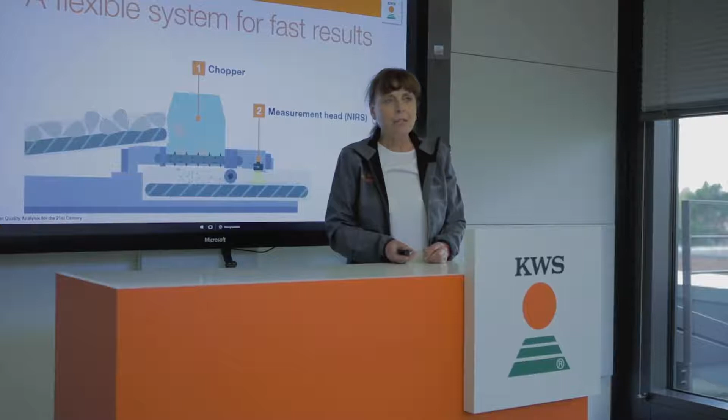I will first give you a short introduction about the development of the KWS BEETROMETER, what we have developed over the last years. At first, I will give you a short look - if you see such a BEETROMETER, it looks very simple. In the end, we have a conveyor belt, a specially developed chopper, and the measurement system based on near-infrared spectroscopy. But the system looks very simple, and so the system is also very flexible.

This allows us to make quality analysis in sugar beet along the value chain of the quality of the sugar beet. We have analyzers on the field, such as BEETROMETERs installed for almost 10 years on harvesters, that allow us to analyze sugar beets directly during harvest for the main quality components. Next, you can use such a BEETROMETER in a receiving station in a sugar factory, for instance, or in a quality lab of a sugar institute.

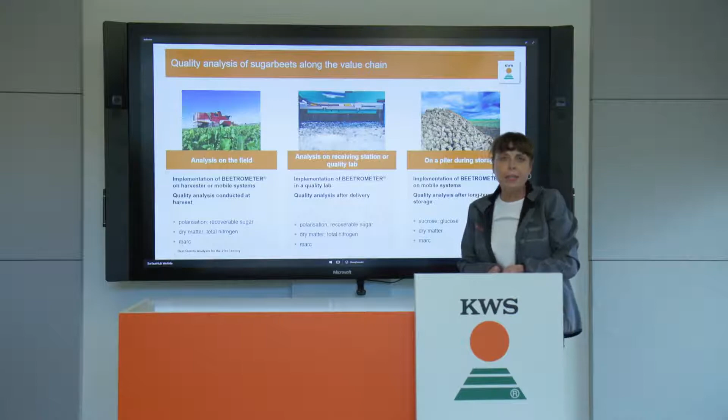Also, therefore, we have respective calibrations. And last but not least, you can use such a BEETROMETER also on a mobile system, on a trailer, for instance, and can analyze stored beets with this system. We have respective calibrations for washed beets, for unwashed beets, for fresh beets, and for stored beets.

The development of such a system has its challenges. The most important challenge is the heterogeneity of the quality components.

The next advantage of our BEETROMETER is that it can mainly shorten the steps in the analysis. In the normal way, in the sugar factory, we have the delivery, then we take a sample, we have the washing process, the sawing process, brei processing, preparation of the filtrates, and the analysis.

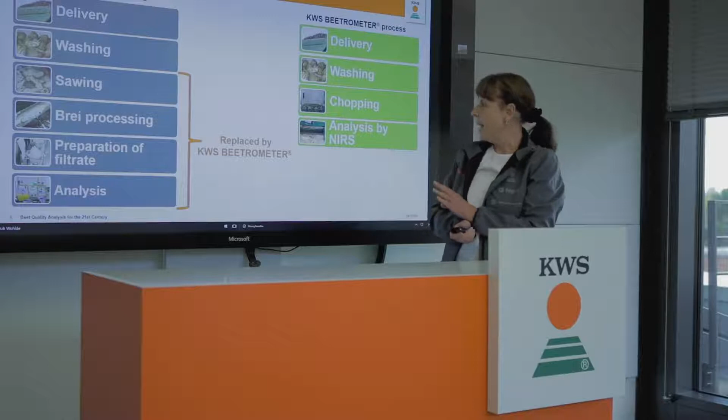With the development of the KWS BEETROMETER, we are able to replace many important steps. Of course we still have the delivery of the beets, and the washing process of the sample we have taken, but all the other steps are completely replaced by our KWS BEETROMETER.

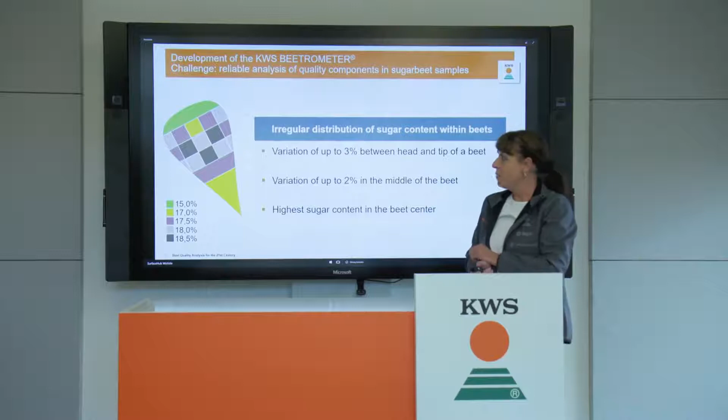Now I come to the biggest challenge when you develop such a method. The main problem is, as I said, you have an irregular distribution of quality components within a beet. We did a special trial four or five years ago, analyzing the different segments of a beet.

What you see on the left side are different colors, and the segments mark different sugar content. You see that alone between the head of a beet and the tip of the beet, there is a variation of sugar content of up to 3%.

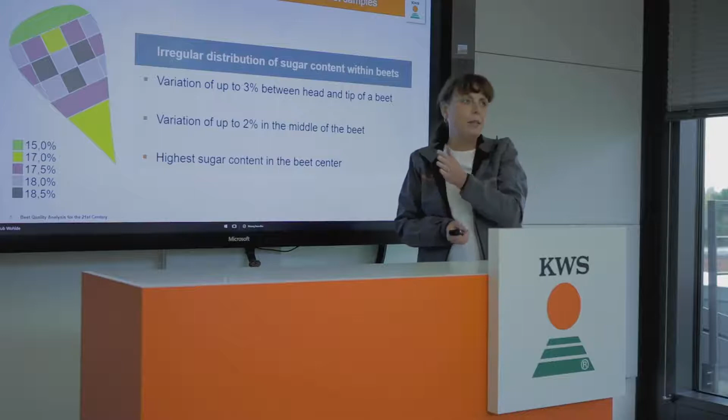And if we then look in the middle of a beet, comparing the outside of a beet and the center of the beet, we have a variation of sugar content of up to 2%.

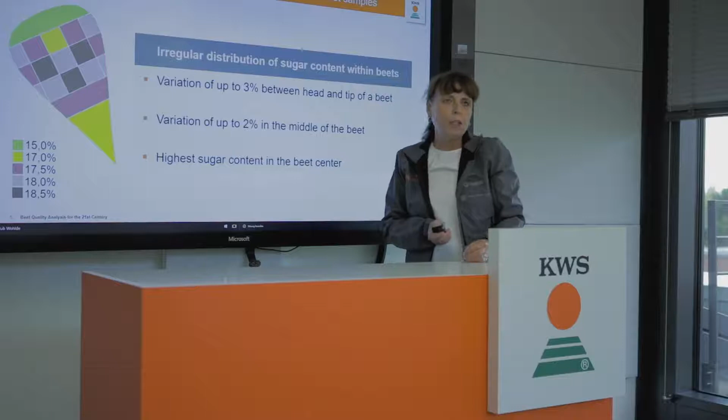The next problem is that this irregular distribution of quality components exists not only within beets, but also between beets. As an example, from a uniform field, more than 450 samples were taken, with a sample size of around 12 beets.

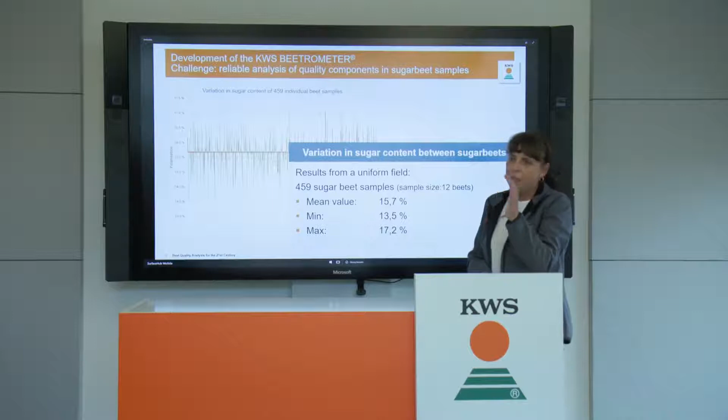Then the question I always get is: if you compare the results of the BEETROMETER with a typical price sample, how big is the difference? Then I ask you, as an analytical scientist, what is the real value from the sample?

For instance, we have a delivery of 25 tons. From this 25 tons, we take a subsample of around 40 kilograms. We do our pre-processing, then take a subsample of 26 grams, and in the end we make a filtrate, using only a few milliliters for the analysis.

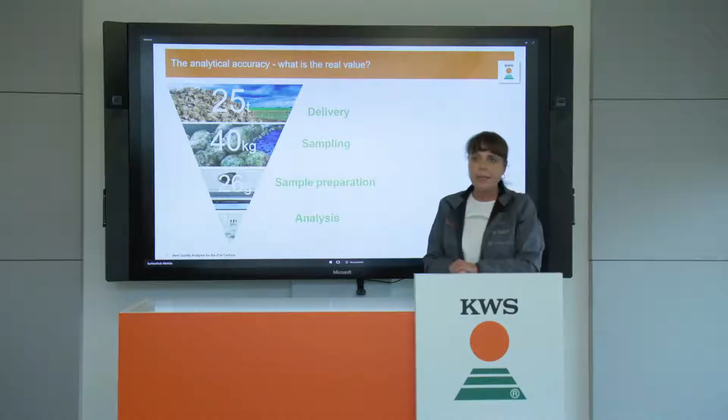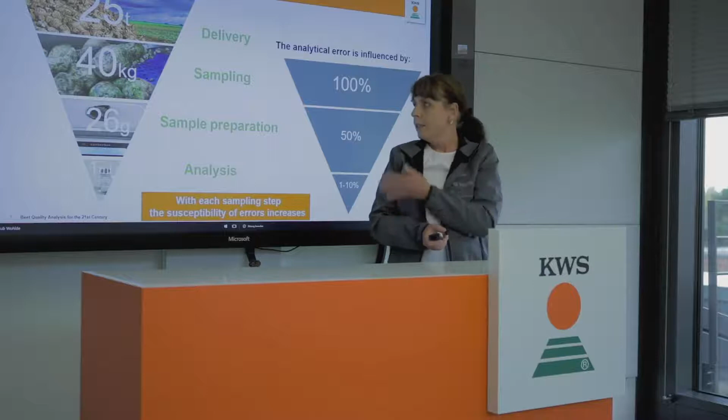From the analytical point of view, the biggest error comes from the sampling step itself — first when we take the subsample of 40 kilograms, and then in the sample preparation, the brei production.

Brei production is a very important process. You have to include all parts of the beet, and all beets of a sample. If done correctly, you end up with around 1.5 kilograms of brei, from which we take only 26 grams for analysis, and from the whole filtrate produced in the laboratory, we use only a few milliliters.

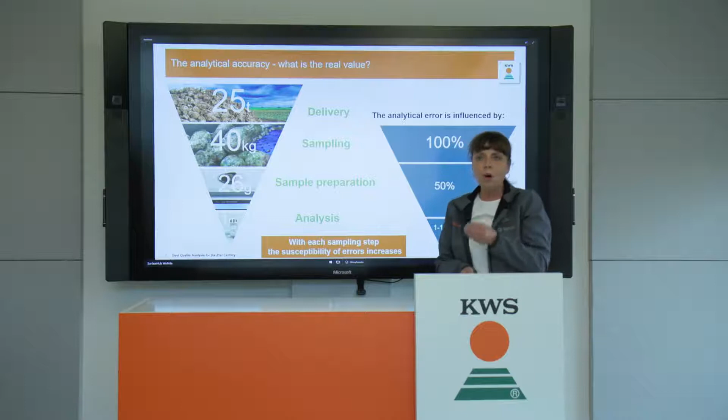That means with each sampling step, the susceptibility to errors increases. If we think about applying near-infrared spectroscopy to develop a method, we have to consider the sample preparation.

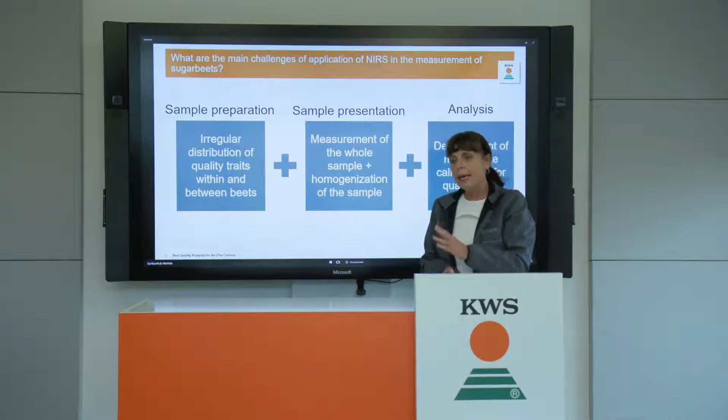We have to think about the irregular distribution of quality components within and between beets. We need to measure the whole sample and achieve a homogenization of the sample. And last but not least, we need multivariate calibrations for the prediction of the quality components.

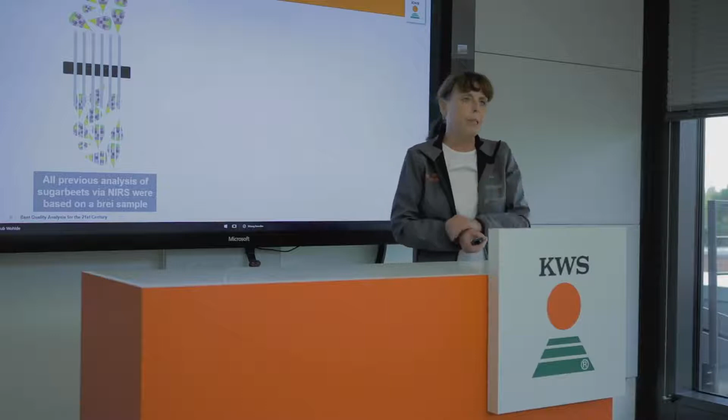At the beginning of the development, what we had seen from previous analysis with NIR spectroscopy, all of this work was based on a brei sample. This is clear since the production and sample preparation of a brei sample is a well-known approach and well-accepted worldwide method for sugar beets.

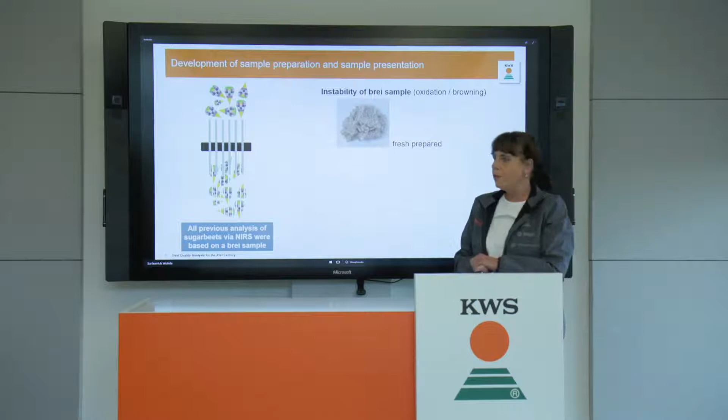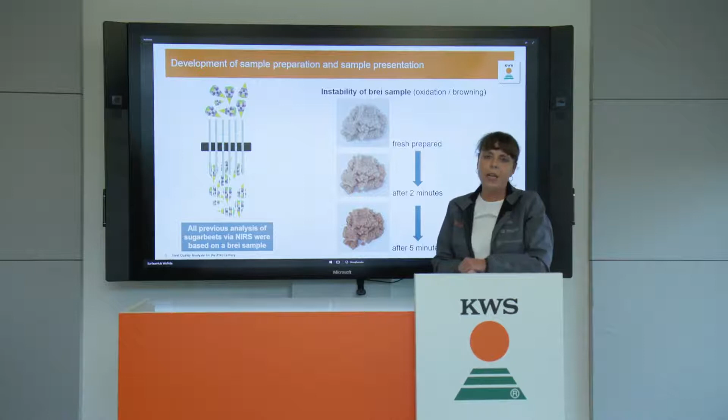The problem is it's the right approach for subsequent wet analytical chemistry, but such a brei sample is not stable. We have high instability, and if you produce such a brei sample, within a few minutes you have a change in color from white to dark brown. We have not only a change in color, but also immediately after processing, an influence on the sugar content.

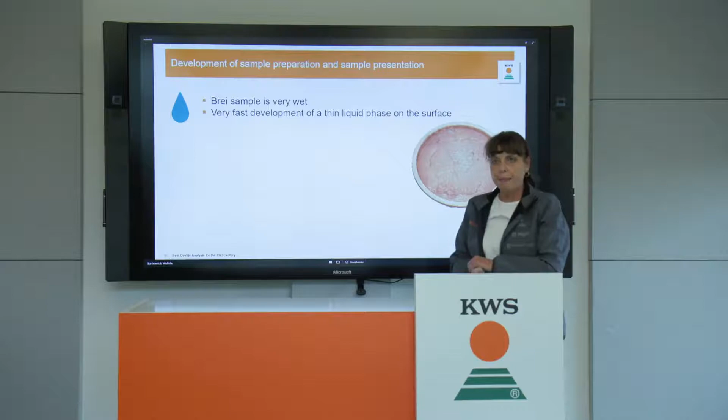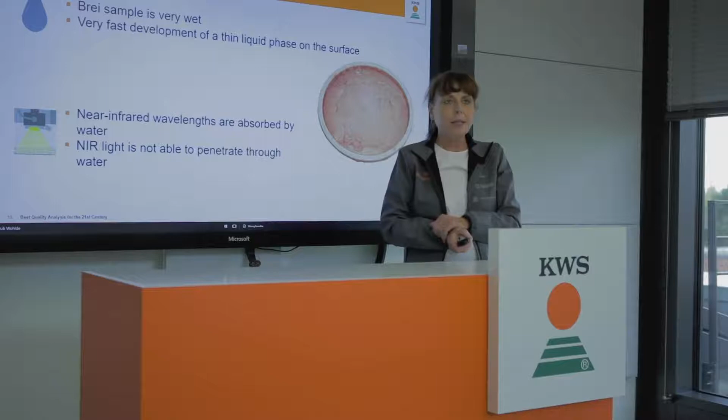The main problem with such a Brei sample is that it's very wet. It's clear our sugar beets consist of 75% water only. What happens is you have a very fast development of a thin liquid phase on the surface of such a Brei sample. If you respect the rules of near-infrared spectroscopy, you know near-infrared wavelengths are completely absorbed by water, meaning NIR light is not able to penetrate through water. So if you make a measurement on a Brei sample's surface, you analyze only a few microliters of the liquid phase. If you put your Brei sample in a glass cup and measure on the bottom, you also only analyze a few grams. So it was clear: for the application of near-infrared spectroscopy, Brei is not a solution.

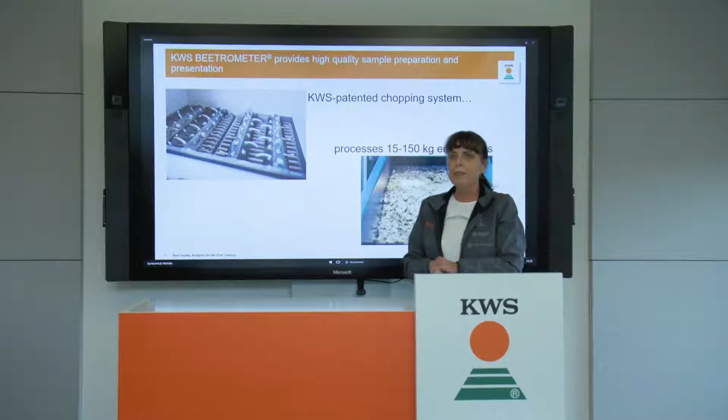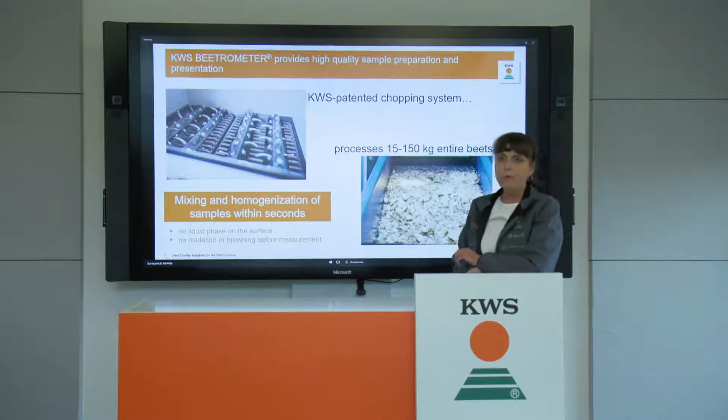Therefore, we developed a special chopping system that allows us to process between 15 to 150 kilograms of beets in only a few seconds, including mixing and homogenization steps. We have no liquid phase on these chopped beets, and this is important. Since this works so fast, there is no oxidation and browning before the measurement of the chopped beets. This was the basis to develop the method for near-infrared spectroscopy.

Today we have a uniform sample presentation with a pressure roll producing an even surface from all the chopped beets. We can analyze the whole sample. There is no further sampling step inside, since the whole sample and chopped beets are moved under the sensor. At a distance of 200 millimeters to the sample surface, every 40 milliseconds a spectrum is scanned while the chopped beets move under the sensor.

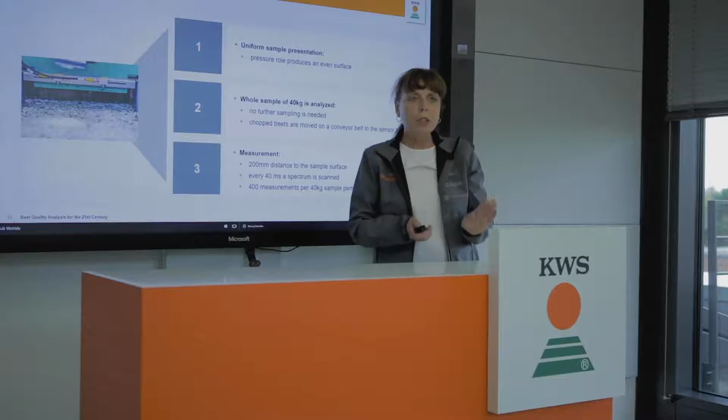So in the end, from a sample size of around 40 kilograms, we have more than 400 spectra analyzed in 15 seconds, and the whole process, including sample preparation, takes only 20 seconds.

This was an overview about the work process of the BEETROMETER, and now I will hand over to my colleague, Elton Carvalho.

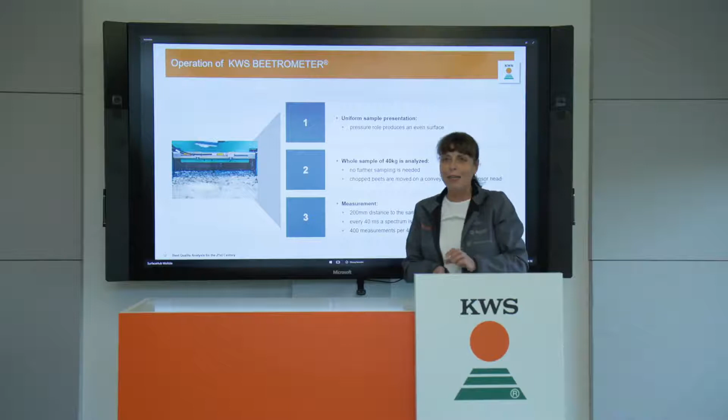Thank you, Elke, for this wonderful presentation. Weren't you impressed by this? This took a lot of time, 10 years of hard work, yeah? Well, this makes my job as a business manager so much simpler. Because a good product sells itself.

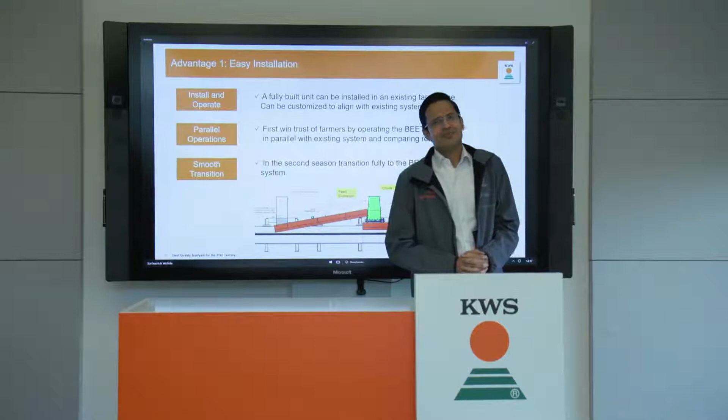Say, assume, like me, you were equally impressed with Elke's presentation. You trust KWS as a reliable partner within the sugar beet industry, and you want to move forward into the 21st century. What would be the advantages for you?

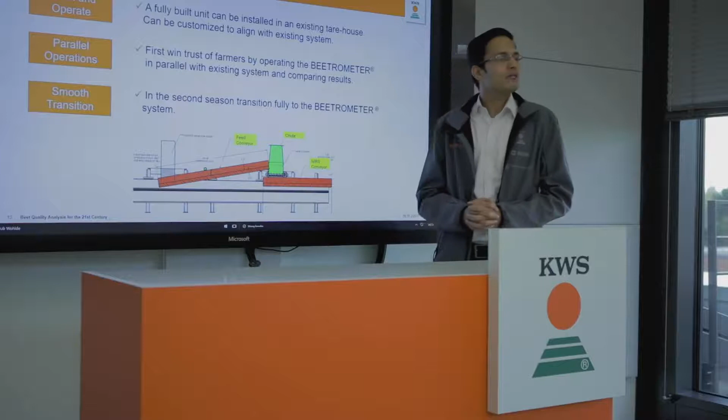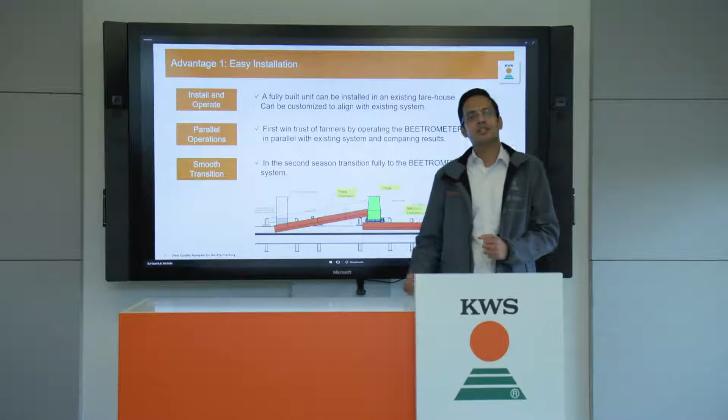The first advantage is that the BEETROMETER is a complete system. It's an industrial unit ready to be used. It can be installed within an existing tare-house, in parallel to your operations. Initially, of course, you need to win the trust of your farmers that this system gives accurate results. We have the possibility of installing this system in parallel to your existing system, so you are able to compare results and win trust before fully transitioning into this system.

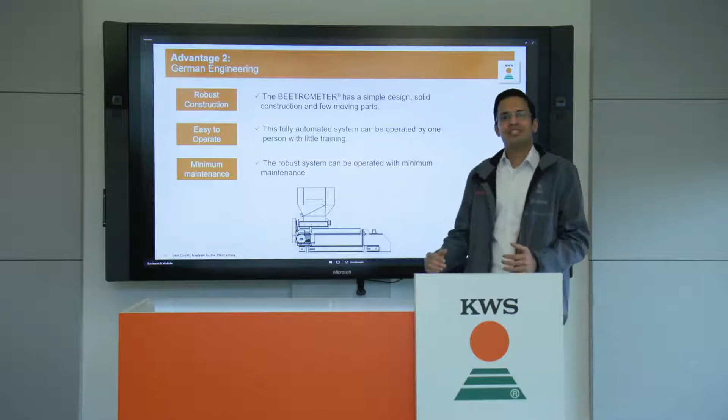The second advantage, I want to highlight, is that the technology behind the system is very complicated, but from a design, operation, and maintenance perspective, it's as simple as it gets. There are few moving parts, it's a robust construction, it's easy to operate, and it involves minimum maintenance at all points in time. And finally, it does the job for which it has been built.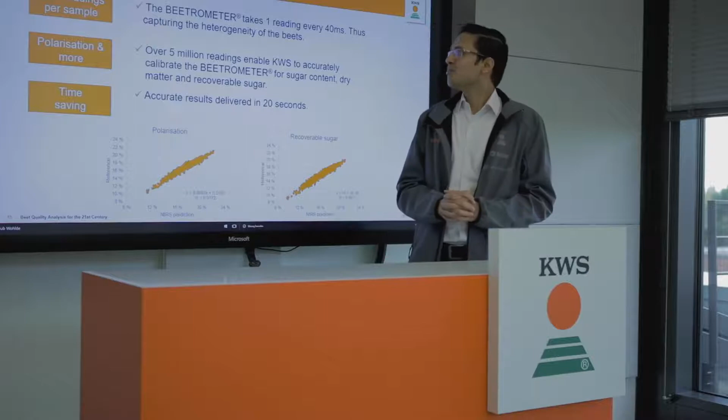It gives you accurate results. In fact, every sample of beets tested has a minimum of 400 readings, that means one reading every 40 milliseconds. KWS over the years has collected over 5 million readings, meaning we have accurate calibrations for all kinds of beets and can give you accurate results in only 20 seconds. So it serves your need.

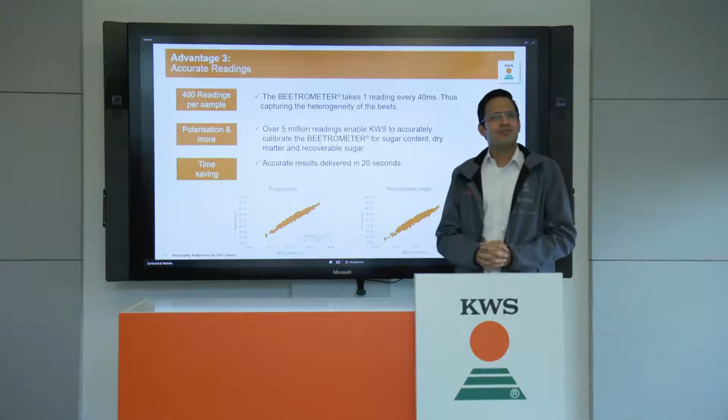But then, a lot of you will ask: we have had our existing systems for the last 10, 20, sometimes 40 years. Why do we still need to change? Here's why you should change.

We have studied this system and we have tried to improve it. With automation, we have fewer human errors and sampling errors. The entire process is standardized, thus giving you reliable and accurate results.

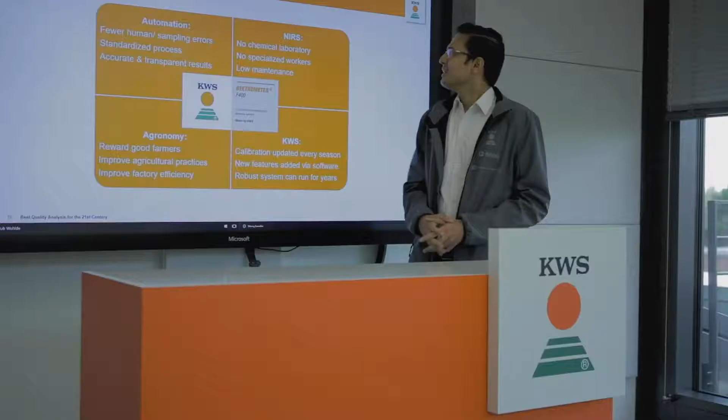The second point that we have done away with is the use of chemicals. A lot of these are highly polluting and need specialized workers on a seasonal basis to handle them, and this also leads to a lot of maintenance costs. With our NIRS system, we do away with all these requirements.

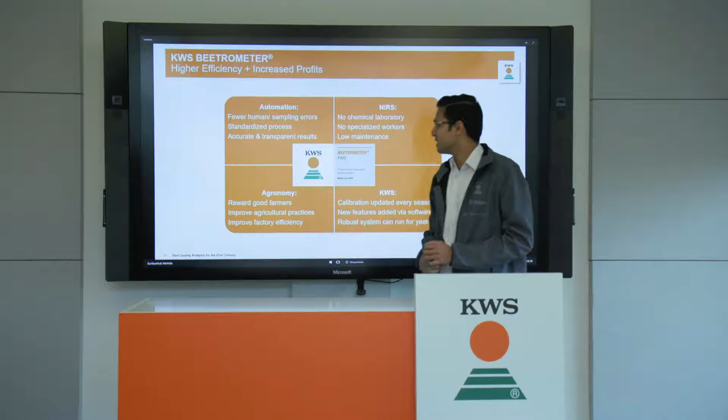The third point, agronomy. What happens with existing systems, because of the high cost of testing, we tend to reduce the amount of sample testing that we do. Here we say, go in for more testing, get accurate results, and reward the farmers who bring in beets with high recoverable sugar content. This improves agronomical practices within your farmers and improves the overall efficiency of your factory, because when you have beets with high recoverable sugar content, you have a more efficient factory.

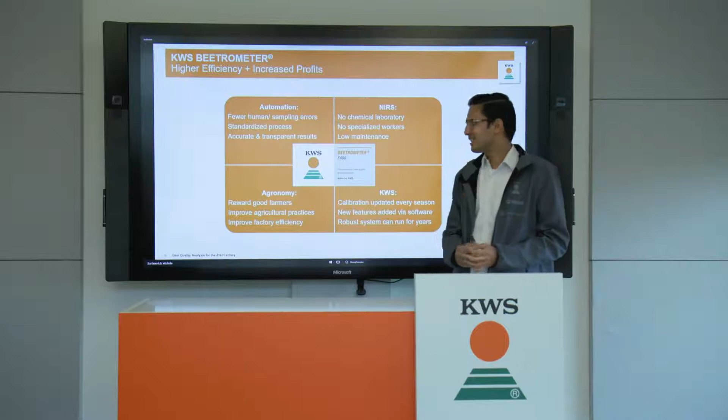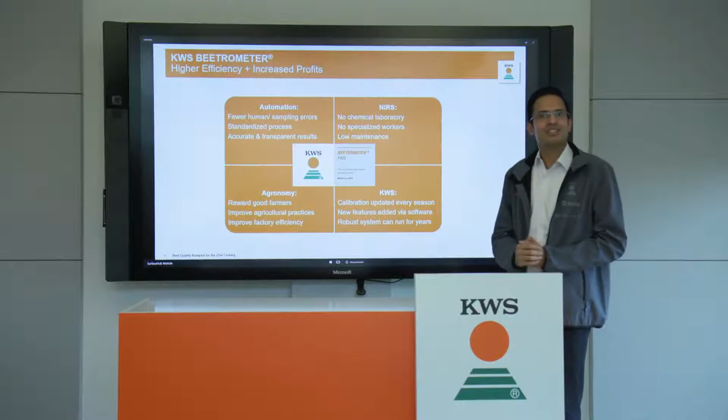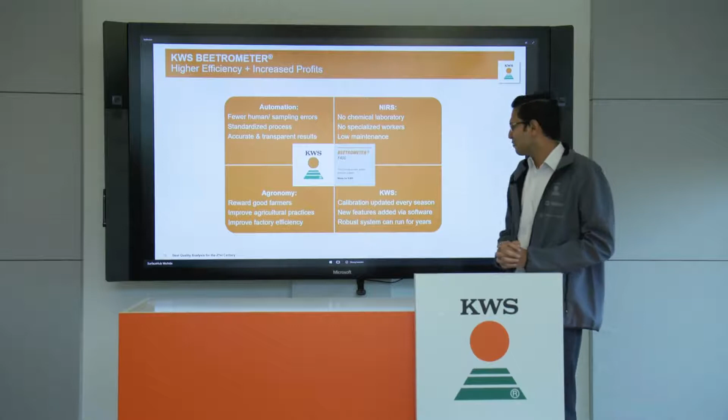And the final point, KWS, as Jörg has already mentioned, has been in business for 160 years. With the BEETROMETER business, we plan to be here for a long time too. That means every year the calibrations are upgraded into your system, all new features are updated via software update, and we have a very robust system which will run for years.

To learn more about who will build this system, I introduce you to Mr. Martin Herman from Putsch. Putsch is an old name in the sugar industry with very reliable results. They are the manufacturer of this BEETROMETER. Over to you, Martin.

So today I will present to you the Putsch tare house solutions. But before I start with that, I would like to spend a few words on the Putsch company. Putsch is a private company owned by the family Radinger and was founded in the year 1871. So starting from next year, we are celebrating our 150 year anniversary, and of course with a lot of new products and process solutions we are going to introduce to the industry. I hope you will follow next year what we are presenting.

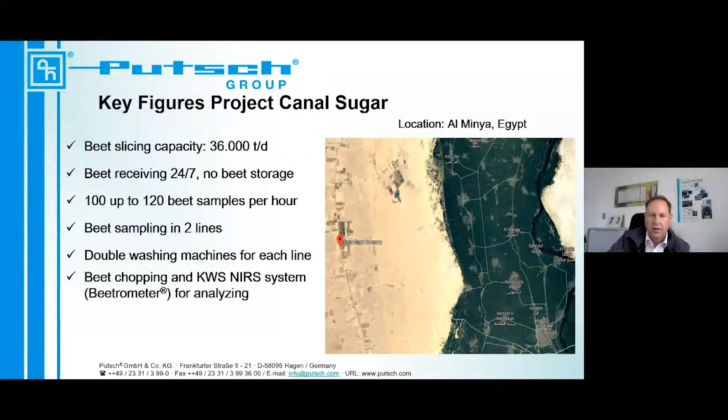So with the next slide, you see the concept of the beet sampling lines as a 3D model right now, because the factory is still under construction. Of course, we have considered 2 beet sample lines. Each line is capable of processing 60 samples per hour. We have here 2 driveways. Then, of course, we have the traffic lights for the exact truck positioning before the beet samples enter the tare house building.

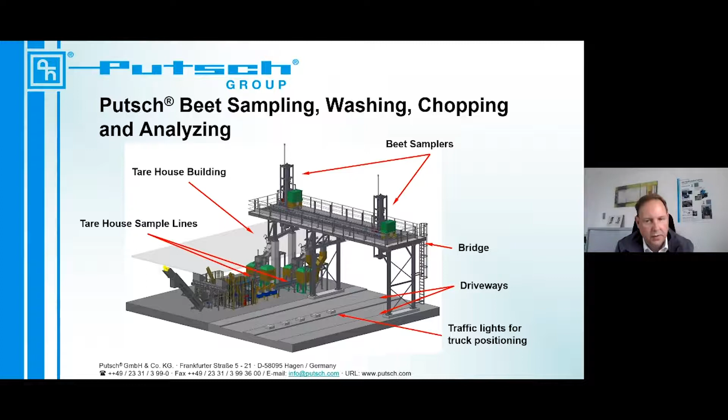Having a closer look at the Putsch tare house system, the beets will be going to the slide and into the funnel first to the gross scale. Then this will be led to the double chamber washing machine. Of course we can decide which side of the machine the slider installed is used. So then we have a perforated belt, and the topping machines if needed or applied. Then we have a single bucket elevator with a net scale integrated, which makes it very easy.

Then we go into the BEETROMETER unit, and this is very interesting, we have only installed 1 BEETROMETER unit for the whole samples.

Of course, we do the complete automation and software. You can see that also later on in a short video presentation. Here is only a screenshot of the control system which we did. So you can really online monitor all the steps and all what we do.

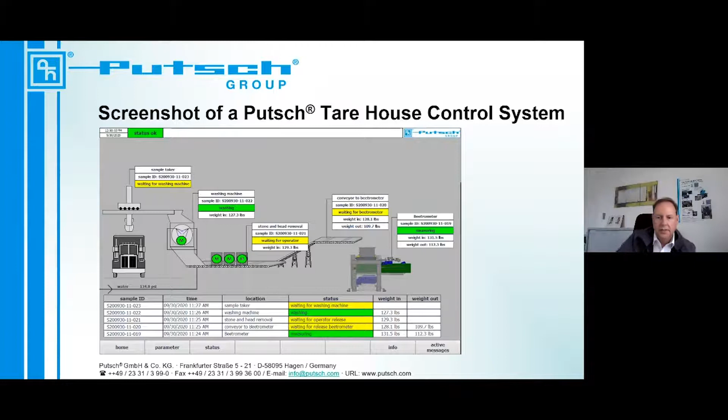Each sample has an ID, so you can easily track each sample and evaluate immediately within minutes.

Important for the beet sampling, and this was actually the first thing we noticed when we got into this business, is that beet sampling was often only picking in the front part of the truck, or maybe more in the middle part. So we divided the truck trailer load into 9 sections, as you can see on the right hand side.

This allows random, selective beet load picking for the picker, to really select the samples either from the front or the end, or from the middle part, and really close to the side walls.

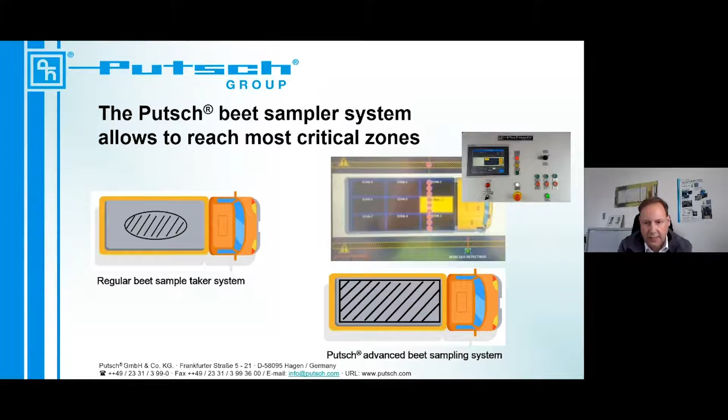The beet sampler itself is a little bit modified compared to designs you may know from your factories or from Venema design. Today it's a very sturdy design made out of 3CR12 or Hardox material, and even the whole pipe where the beets go through is a special coated material.

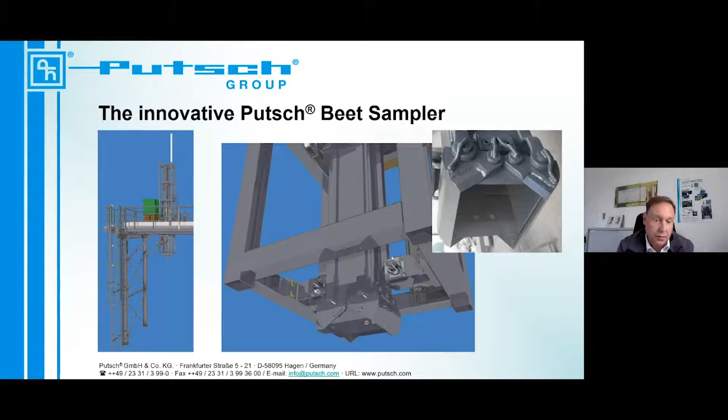So the beet sampler is capable, like we also saw in the previous presentation, of picking up 40 kilograms of beets. With the next short video, you can see an old beet sampler in operation.

What we also do, if you are interested in upgrading your old system, is the complete software automation and also hydraulic upgrades for automatic beet sampling.

You can see here that the beet sampler, even with the strap or the steel bar there, is not touching it and goes straight to the side wall of the truck. We also divided this into 9 sections, making it very easy to control.

The Putsch automatic washing machine, here designed as a double washing machine. We also provide a single washing machine depending on the capacity.

The beet washing machine is designed for high pressure wash, so we can apply water pressure with the jet nozzles up to 15 bars max. Usually a range of 8 to 9 bars is sufficient for a good cleaning result of the beets before it goes onto the inspection conveyor.

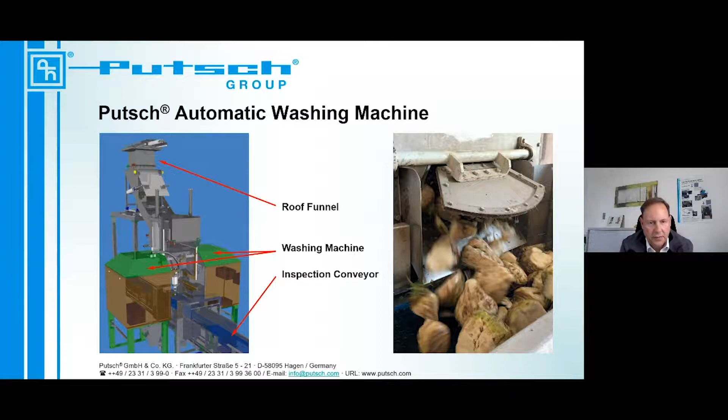As I said, this inspection conveyor has some holes in it for drainage. We collect the drainage in a container so that no water or dirt is splashing around the area.

At the end of this unit, we took the design from KWS, but we also redesigned this unit as a very compact unit.

You can even see here on the picture that the beet chopper together with the NIRS system is installed on rollers, so it's easily movable.

We also have now installed here the HMI touchscreen for local control. It's either attached to the unit itself or somewhere else, depending on local conditions.

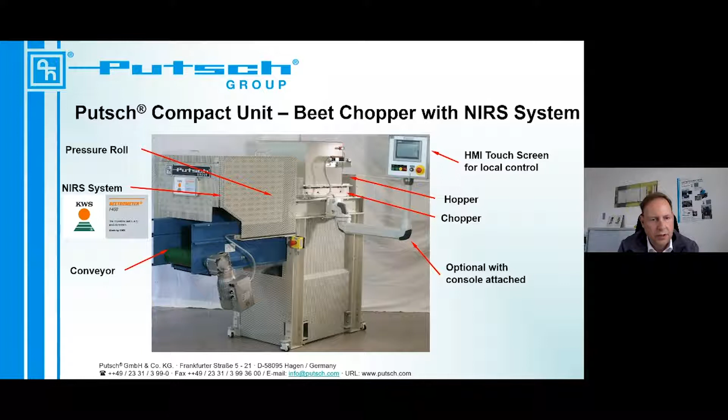The beet chopper, which is a KWS design, is equipped with so-called chopper hooks, which are a forged design and very sturdy.

Here you can see a 4-shaft design, depending on how many kilograms of beets we need to process. We also have a 2-shaft design available.

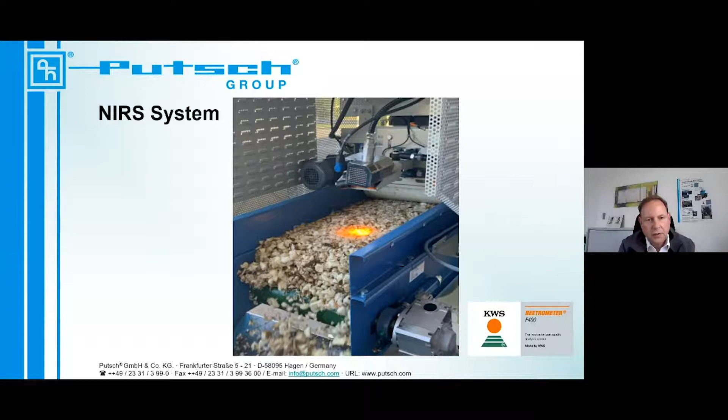With the NIRS system, we have a swiveling head for this leveled and also compacted beet layer, which is also done by a pressure roll, which you can see later on from the American installation. This swiveling head can measure the whole beet layer.

So this is, of course, from my part. Thank you very much for your attention, and I give back to Elton.

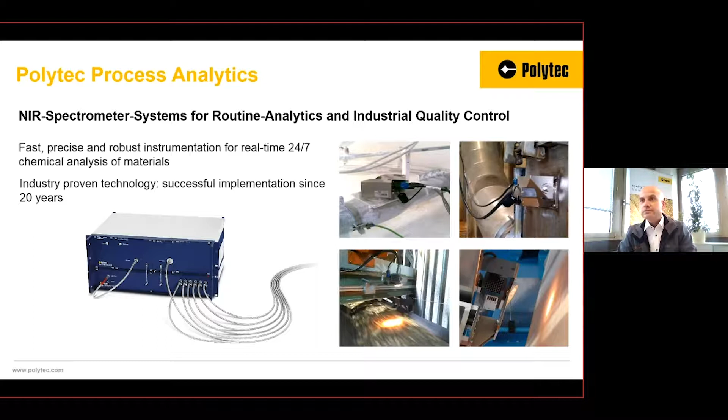Polytec provides spectrometer systems for many industries and applications, starting from agriculture, feed, biotech, chemical, pulp and paper, and many other industries, up to those where really strict regulatory requirements should be fulfilled, like pharmaceutical or food industries.

Talking about various industries and applications, as one good example I can mention our close and successful cooperation with KWS that lasts also since almost two decades, where we target some seed breeding and industrial process control applications by developing and commercializing dedicated products and solutions like BEETROMETER that we are presenting you today.

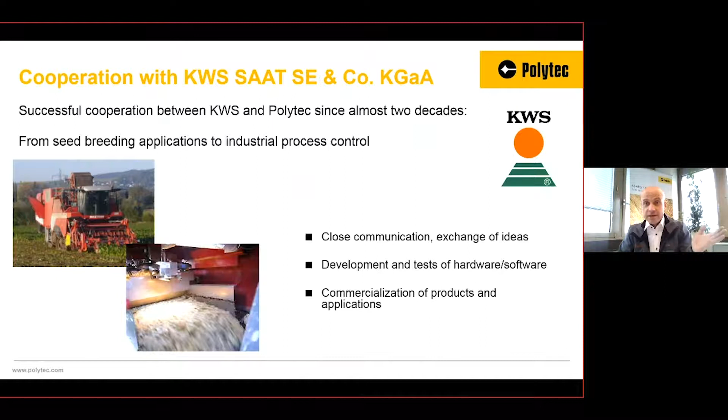Now let me briefly explain how this BEETROMETER part, where the measurements are done, or in general, how near-infrared spectrometers work, and how one can get precise and immediate results.

The principle behind is pretty simple. It is based on optical spectroscopy, the technique used to investigate how light interacts with a material of interest. With a certain broadband light source, the sample is illuminated, and then this transmitted or reflected light is split into individual colors, so-called wavelengths. This response curve is called spectra, and such examination is done in the near-infrared spectral range, which is above the visible range that we see with our eyes.

Since every material consists of different constituents, different molecules, the absorbed light also differs accordingly. So chemical information of the investigated material can be evaluated from such a spectra. The qualitative information about the composition of the material is defined by analyzing the position of these absorption peaks. Each material will have a different spectrum and therefore a different number and position of such peaks. And quantitative information, so concentration, telling how much of a specific substance is in the material, is analyzed by looking at the height of these specific peaks.

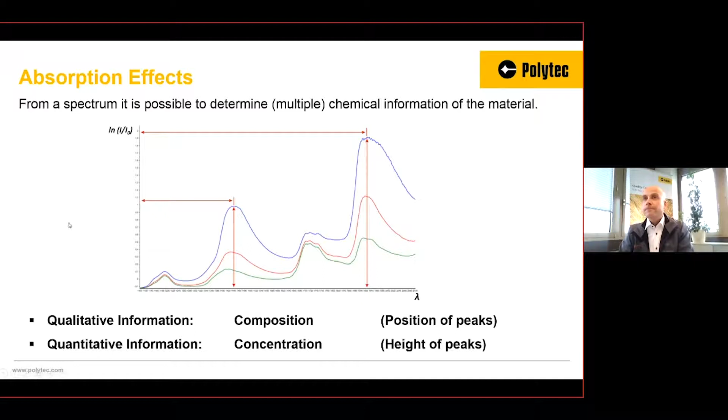In general, near-infrared spectroscopy has some advantages compared to conventional laboratory analytics. No sample preparation, so no chemicals are required. It is non-destructive and non-invasive technology. It is really fast, allowing measurements in real time and directly at the required location. It is representative, since all the samples are measured and not only a small fraction or subsample. And of course, the corresponding decision can be made faster since all results are immediately available.

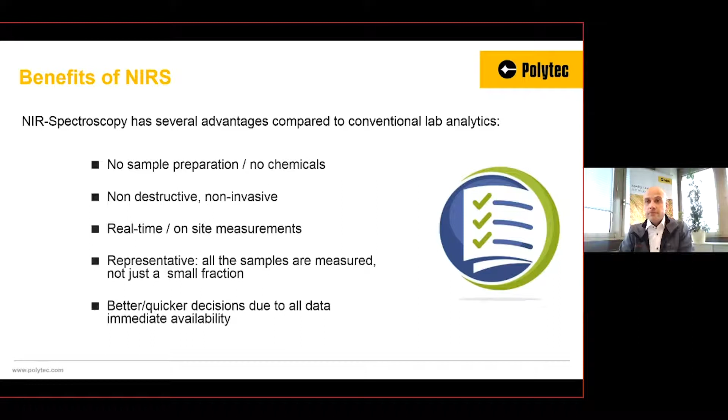The NIRS for BEETROMETER setup consists of three main modules: the sensor head, where illumination and light collection take part, installed over the conveyor; the spectrometer, where the reflected light from the sample is dispersed and detected; and finally the industrial computer with corresponding software, where the recorded spectra are processed and measurement values are calculated.

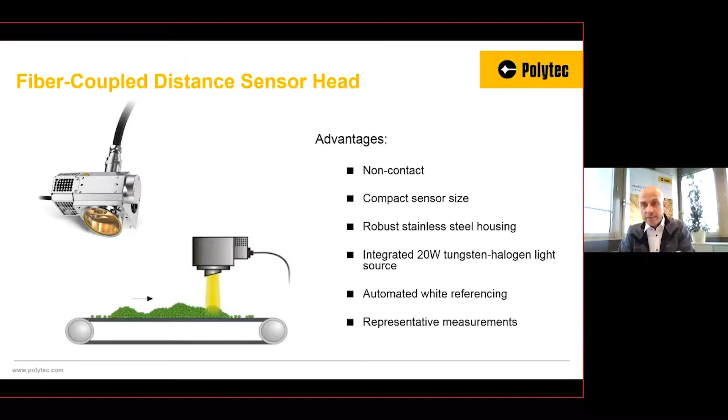Now let's have a closer look at the sensor head. Using such a distance sensor head leads to several advantages. The measurements are non-contact and non-destructive. The sensor is quite compact, so it can be installed easily in various lines. It is robust, with no moving optical or other sensitive parts. It has an integrated light source with automated white referencing. And finally, such a sensor can be installed over moving samples or conveyor belts to gather representative measurements from all the material passing by, not just a small subsample.

Here you can see several photos from such sensor head installations above conveyor belts, where measurements on samples are done.

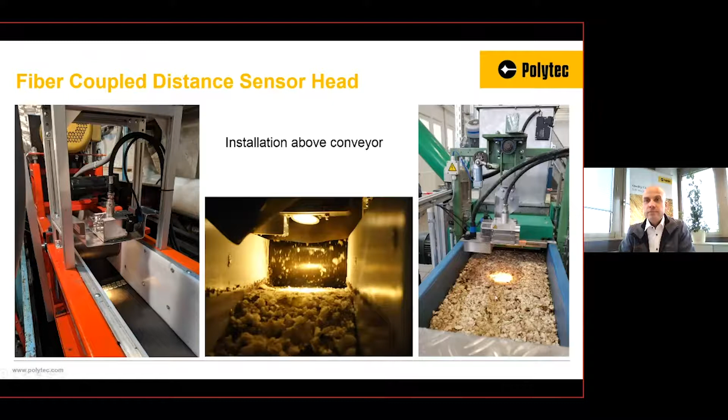The spectrometer itself is based on a high-end optical setup with a holographic grating and diode array detector. This brings several advantages: robust industrial design, and superior optical performance for more light throughput and sensitivity. This leads to really fast measurements being performed—one measurement lasts a fraction of a second. And such a fast system allows measuring samples in movement, so more material can be analyzed.

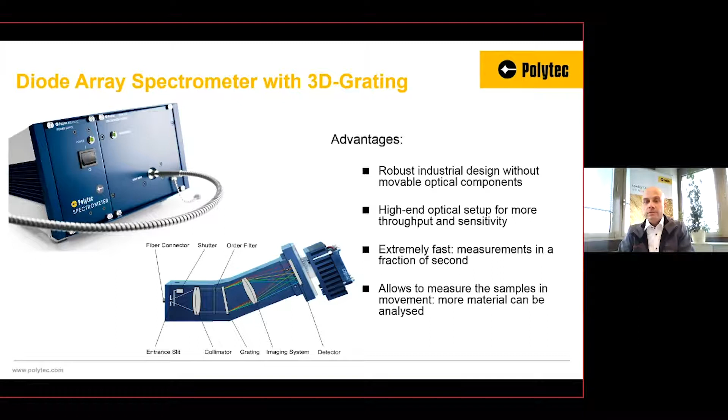Finally, we offer real-time process software with an industrial computer and corresponding interfaces that transfer data and can communicate with various industrial control and data storage systems. So such a flexible, yet robust, fast, and precise spectrometer system can be easily integrated into a new or already existing arrangement or processing line for reliable measurements and quality control applications, like, for example, BEETROMETER.

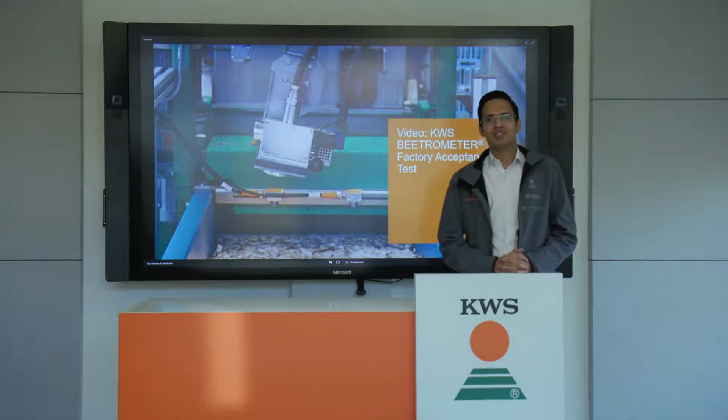Hello, my name is Elton Carvalho. I'm the BEETROMETER Business Manager at KWS. Today we are going to conduct the factory acceptance test on the BEETROMETER unit at Puch, the manufacturer of this unit. Come along.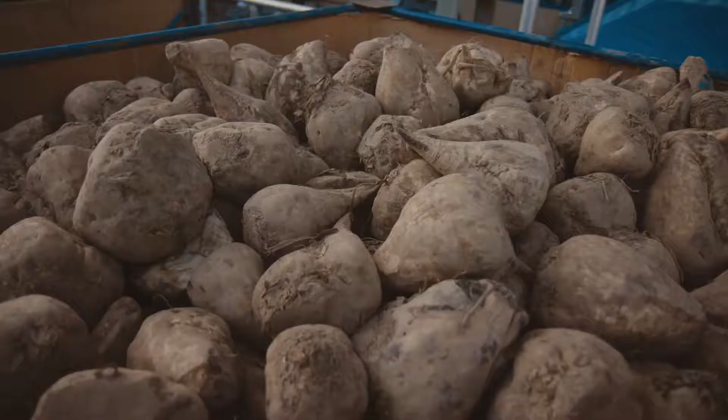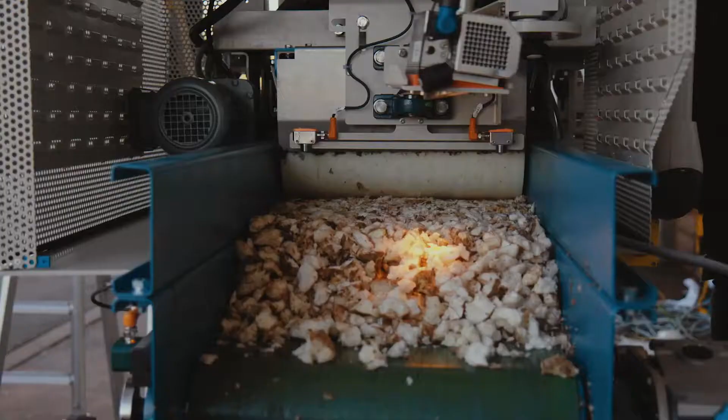During this test, we check the BEETROMETER for robust construction and design, smooth mechanical operations, safety features, software integration, and finally, calibration and accurate measurement.

Today's factory acceptance test was successful. This BEETROMETER will be delivered to our client Canal Sugar in Egypt. To learn more about this system, please feel free to reach out to us.

For the next stage of this BEETROMETER event, we take you across the Atlantic to our colleagues in the US. We have Mr. Dwayne Bernardson live from the American Crystal Sugar Company. The American Crystal Sugar Company is one of the first customers of the BEETROMETER. Over to you, Dwayne.

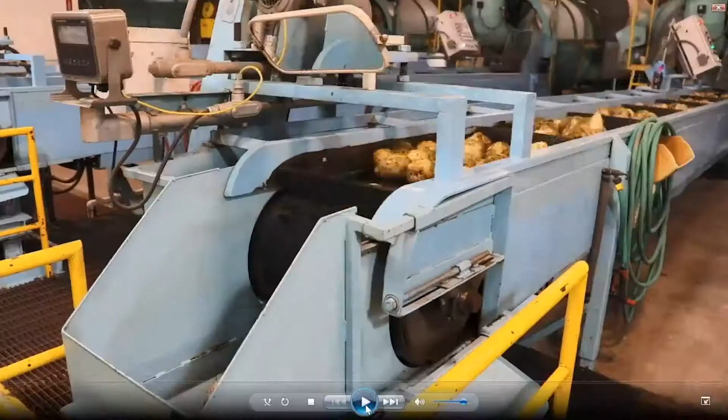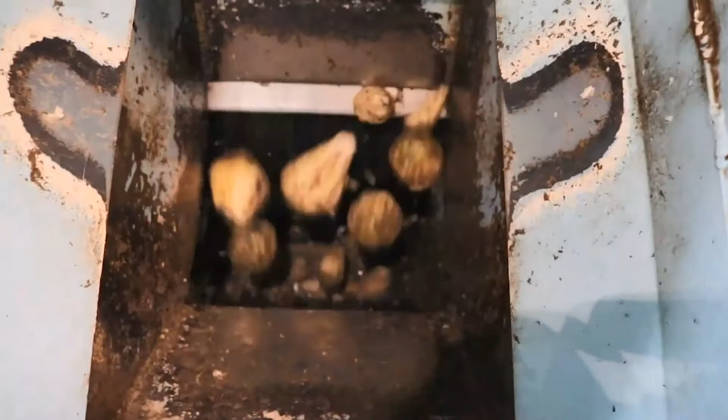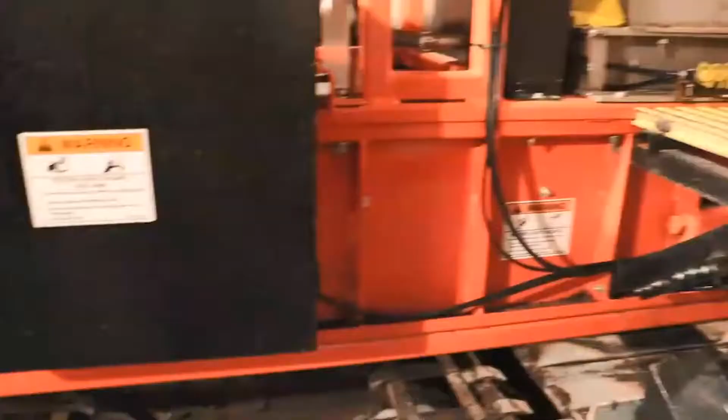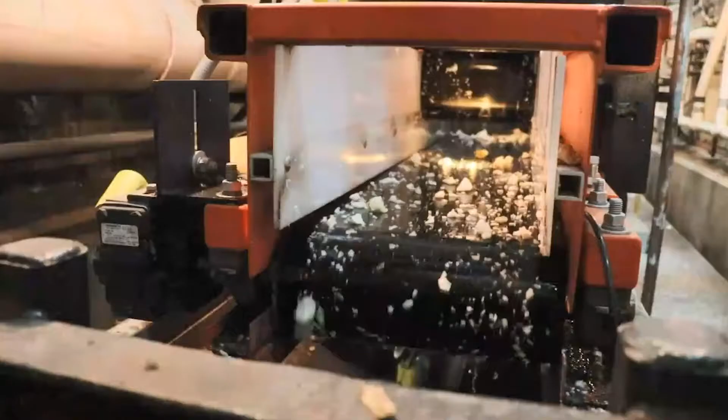We put together a short video of the BEETROMETER installation at the American Crystal Sugar Company Quality Lab in East Grand Forks, Minnesota. They operate 6 identical lines, with each line being able to measure tare, pol sugar, dry matter, and recoverable sugar. After washing, the beets are weighed again clean so that the percentage of tare can be calculated. The scale opens directly into the BEETROMETER chopper, where the sample is processed. Once chopped, the sample is collected on the belt below until enough material is ready to be prepared for measurement. The belt moves the sample under the roller, where it is leveled and compacted to maximize the area for good scans.

From there, it passes under the sensor head, where a scan is taken every 40 milliseconds. These scans are then filtered, averaged, and a prediction for each calibration is saved, along with all the spectra data. A quick, easy, and reliable process.

So Mitch and I just want to talk a little bit about the system here. As the video mentioned, it talked about how the measurements they had used at American Crystal. American Crystal has been using a quality payment system since back in the 1980s. And at that time, they went to a wet digestion measuring pol sugar, sodium, potassium, amino N, and to get their recoverable sugar for their payment, because their growers are paid for how much white sugar they as a grower are able to put in the bag.

This is the second campaign that the BEETROMETER system has been used here at American Crystal.

So I guess before I answer the question, I just want to make sure everyone knows we're practicing good social distancing here and following through. That's why we don't have the masks on.

But Mitch, would you share an overview with your lab and the process you use here? Yeah, thanks, Dwayne. Good morning, everyone. So what we do here, as the video said, we run 6 identical lines with the KWS BEETROMETER system. Annually, we run about 190,000 samples, split into 2 different time sections. Typically, during main harvest, we run 15,000 or so a day. But like I said, we do divide it up into two sections. We call it pre-pile and a main stockpile harvest.

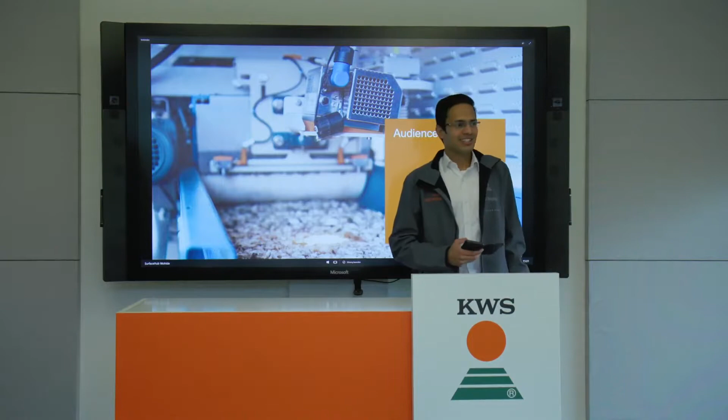I think there are a couple of business questions I should address directly. One question is, can we visit this BEETROMETER and see it in operation? Yes, you are welcome. We have an in-house BEETROMETER in Kleinwanzleben. If you're in North America, you're welcome to contact our colleague Dwayne Bernardson, who is in charge of this business and would be happy to show you. We also have another BEETROMETER being installed at the Canal Sugar Project in Egypt, so we're definitely happy to show you the BEETROMETER in operation.

And of course, in the US market the system is slightly different and the manufacturer is different, but we can adapt the system to your requirements, as we said.

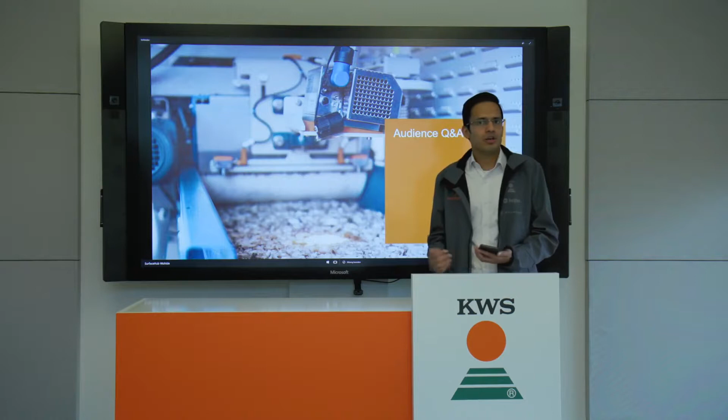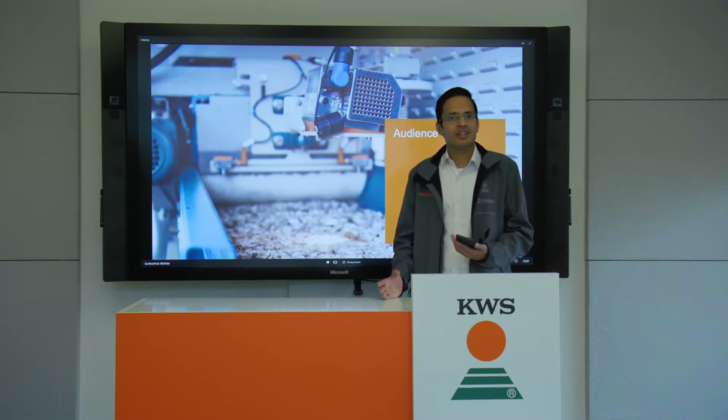The next question is, what does the BEETROMETER cost? Of course, a big question. For that, get in touch with me. We will make you an offer and work with you. We're happy to speak with you, explain how the system works, try to understand how you've worked until now, and then adapt and make you a customized offer for your unit. We can assure you it's much cheaper than other systems, but you need to ask me, or Dwayne in North America.